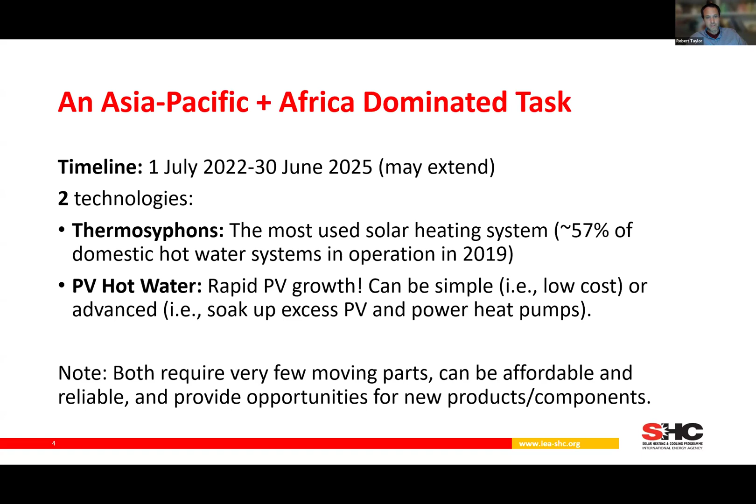The task has basically four parts to it. The first part, as Bärbel mentioned, draws a little bit on the work done by Solar Heat Worldwide—so it's data collection of how many of these systems are installed around the world, what the best practices are for them, and barriers to adoption.

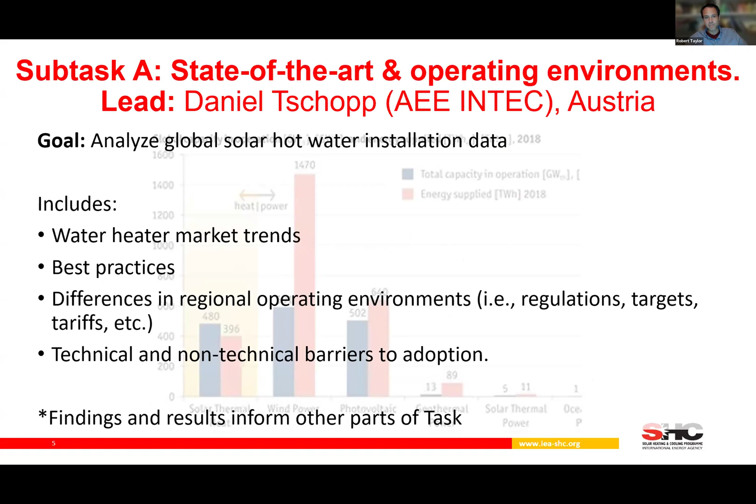There's some interesting work going on, which I'm sure will be discussed in the SOLTRAIN+ program. One of the interesting things associated with that is a test where they compare side-by-side thermosyphons to PV-to-heat systems at the Namibia University of Science and Technology.

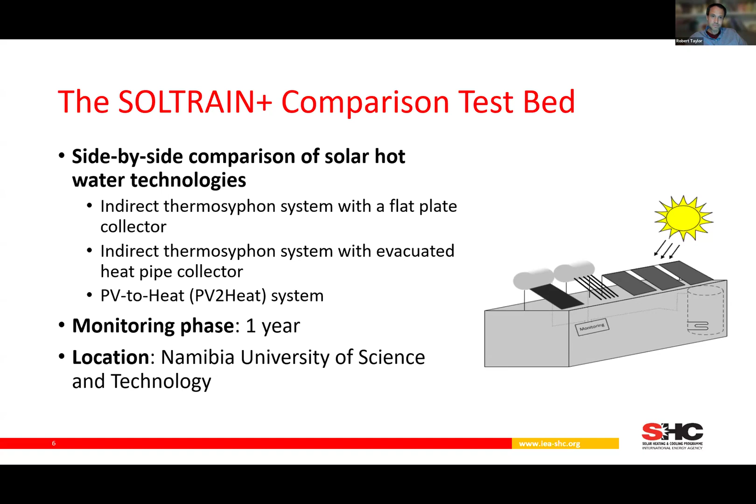The second subtask in the task is about thermosyphon hot water systems. We'll probably discuss quite a bit of that today, but another part of it, which we won't discuss today but you can get involved in if interested after this session, is looking at energy savings and greenhouse gas reductions. I think there's still quite a bit of work that can be done on these systems.

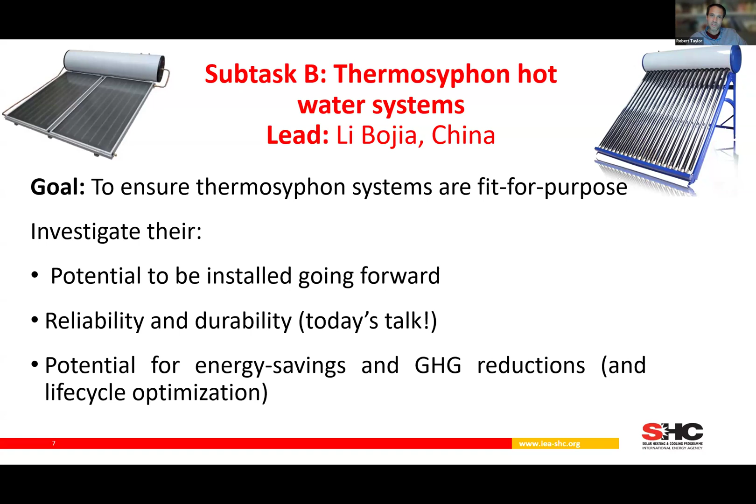Thermosyphon systems, for those who don't know, look like these two pictures at the top of this slide, where the hot water tank is above the collector. They come in mostly two flavors: one is the flat plate collector, and one is the evacuated tube collector. In both cases, as water heats up it expands, and that density difference causes hot water to rise into the tank, while cold water from the bottom falls into the collector, creating natural circulation so you don't need a pump. From that tank of hot water, you can extract water for washing dishes, cooking, or taking a warm shower.

In the third subtask, C, we're thinking about PV hot water systems. Some interesting ongoing work includes surveys we've done, identifying emerging technologies being installed around the world. It's a nascent market right now but set to grow a lot. There are ways to use your excess photovoltaic electrons instead of exporting them to the grid - you can put them into your hot water system directly, or if you have PV electricity on the grid, put that into your electric water heater.

An interesting thing about PV systems is they can also help balance the grid. Some of you may know about the duck curve, the most famous animal in solar energy. The duck curve happens as you get more and more PV on the grid - during the middle of the day, a lot of demand is met by solar generation, but in the evening peak times, solar starts to drop off.

With a solar hot water system, you can shift that around, because you can store hot water during the middle of the day and not need to pull off the grid later. So it's kind of demand side management, and there's value in that.

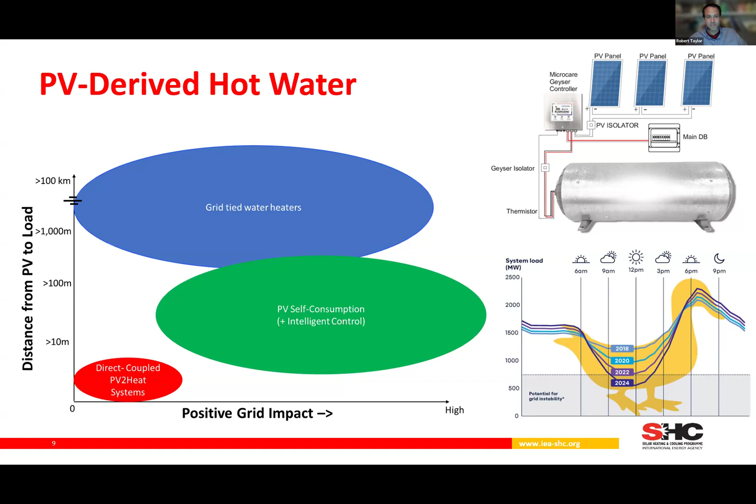If you think about how much hot water is installed around the world, it's actually quite a lot. So there's a big existing thermal battery out there in most households that have a hot water tank. Lastly, in the task we're looking at different ways of boosting training in these systems - this Solar Academy counts as one - and the standards across the world, and maybe what new standards might be needed in certifications for hot water systems.

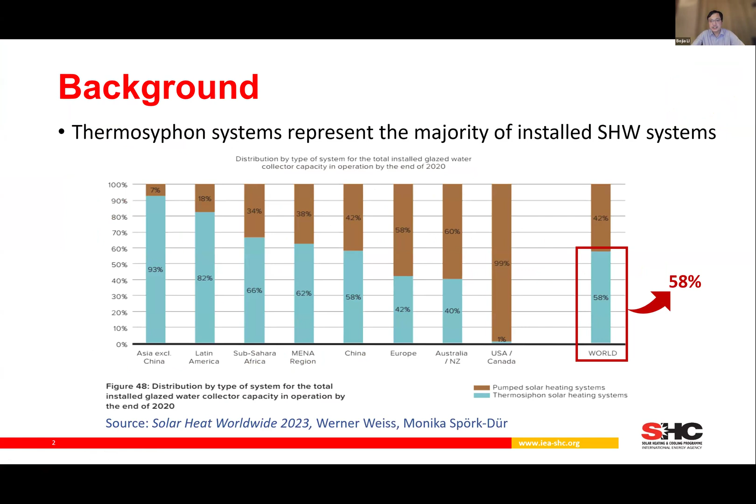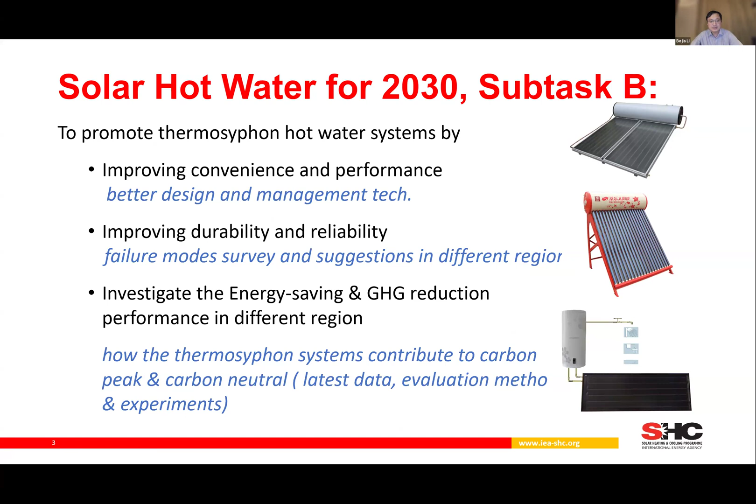Although PV water heaters have gotten great advances today, thermosyphon systems still represent the majority of installed solar hot water systems. So in this subtask, we mainly focused on thermosyphon systems to promote them by improving their convenience and performance, and improving their durability and reliability through our failure mode survey and suggestions for different regions. We also investigate the energy saving and GHG reduction performance in different regions to show how thermosyphon systems contribute to carbon peak and carbon neutral goals.

The first part I want to share is about the durability and reliability survey of our subtask. With help from Rudy, Julimo, and SOLTRAIN experts, we have investigated and surveyed some failure modes, many from the Africa and South America regions. We identified 12 failure modes and divided them into 2 categories: first is design and installation, and the second is operation.

For design and installation, it's about incorrect mounting, wrong position, missing insulation, and some other wrong positioning or not very well designed systems.

For operation, it's about leakage, antifreeze issues, and unsuitable control, corrosion, and especially in the South Africa region, we found poor water quality has some impact on solar thermosyphon systems.

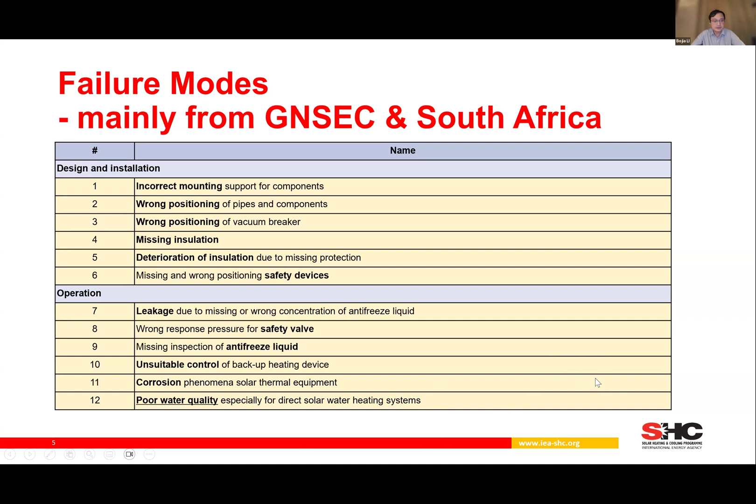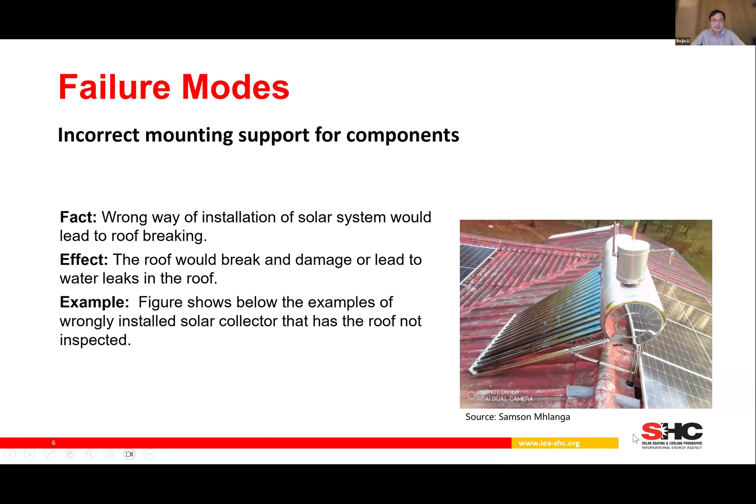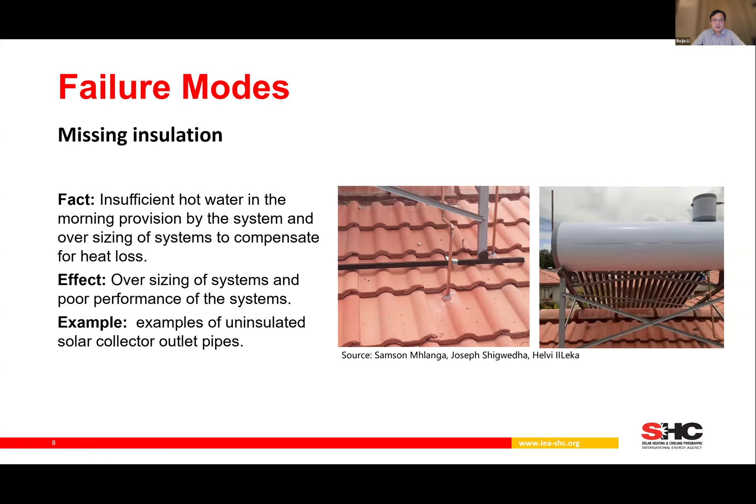The third example is missing insulation. This is very simple - in this pipe, we don't have insulation, which causes extra heat loss and makes the performance of the system not very good. At the same time, this forces the use of oversized systems. The next example is corrosion.

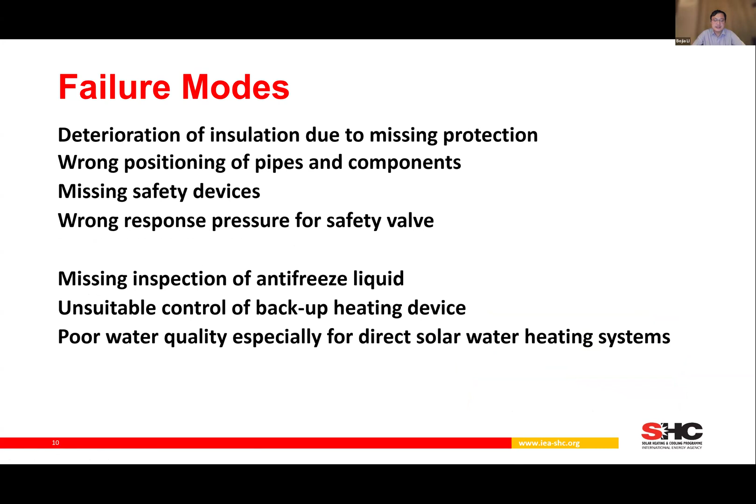We cannot include all the failure modes in today's presentation - there are several other failure modes we have detected, and we give some suggestions for different failure modes. But after all, we raised some suggestions for the total systems to cover different stages of thermosyphon systems, including design, production, installation, and operation.

Because we found many failure modes are caused by different reasons, but if we want to avoid these failures, we could go this way: first is improving the standards and guidelines to give the system a better design and basic performance.

In China, about 20 years ago, there were a lot of problems for thermosyphon systems, but now we rarely hear of problems because the Chinese standards have been improved a lot and they could maintain - they give a basic performance requirement for the product. So the system design has been improved a lot recently, making the product more suitable for Chinese operating conditions.

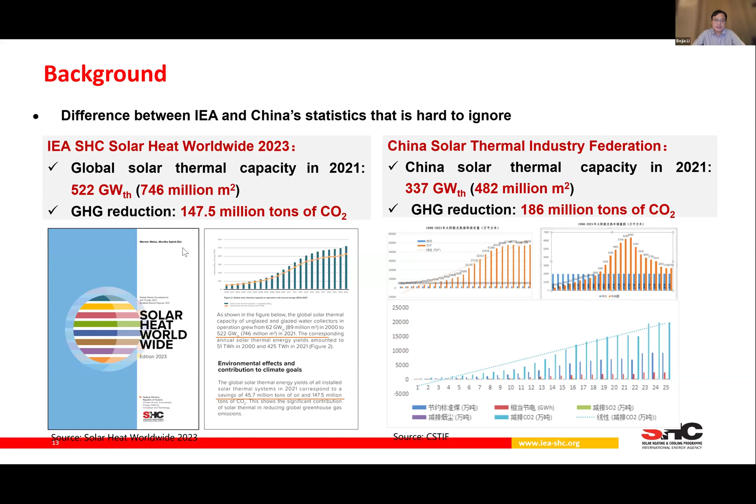There are a lot of differences between China and Europe and other countries that may cause this difference in the greenhouse gas reduction of these systems. For example, the system type in China—compact systems are the most popular—and the hot water demand, with high-rise apartment buildings being more popular, may cause some difference in greenhouse gas reduction performance for China's solar hot water systems. So we want to know how much greenhouse gas China's hot water systems actually reduce.

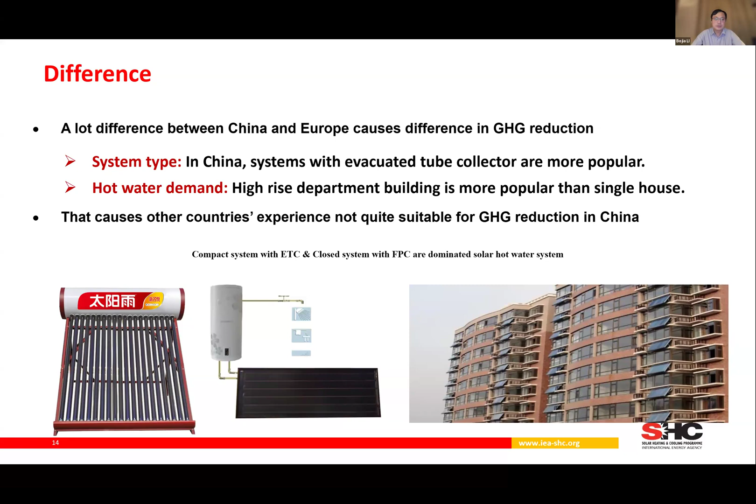To answer this question, together with Solar East and Sunrain, our academy started research on this topic to give a GHG reduction evaluation method and achieve general figures about GHG reduction in different cities in China as a reference for quick review.

The overall approach to ensure the reliability of the method includes these activities. First, we generate a general procedure to evaluate long-term GHG reduction performance of solar hot water systems.

Then, according to ISO and Chinese standards, we give a method to get initial parameters for different solar hot water systems. With these initial parameters, we build a model to calculate annual energy saving and carbon reduction of systems.

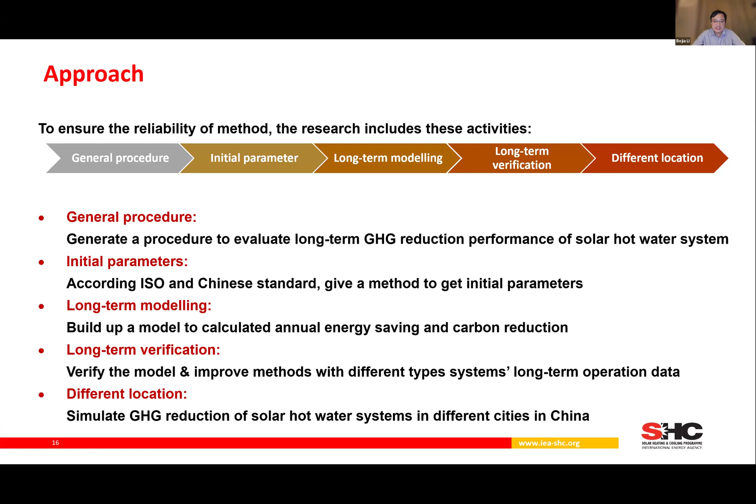We got this result, and to verify it, we built a long-term testing field, using the long-term operation data to verify the model results. Finally, we simulate the GHG reduction of systems in different cities in China with our models.

So this is the general procedure. First, we get initial parameters such as heat gain, heat loss, and output water temperature curve. We use ISO 9459-2 as the main reference.

But for the most popular system in China, the compact system, the drain water temperature remains the same as no cold water is added when water is output from the tank. So we use the Chinese standard 18708 to test this type of system and get the initial parameters.

The second step is to calculate the annual energy output and saving with simple software. This software could calculate the daily energy gain, using a method similar to ISO 9459, modified to suit the compact system.

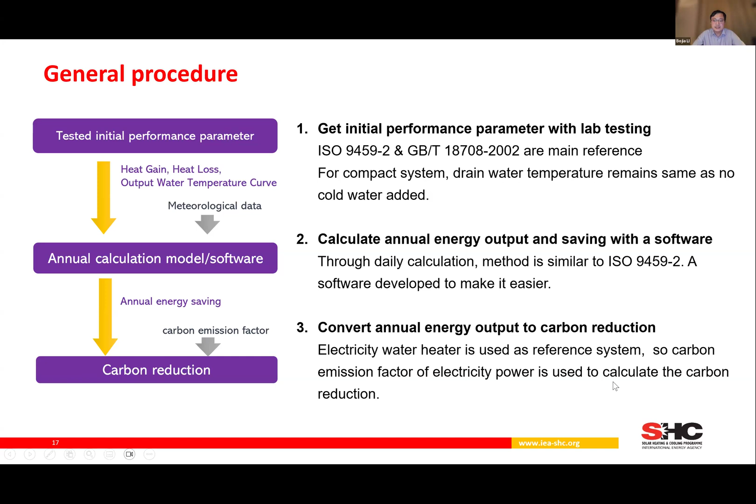The third step is to convert the annual energy output to carbon reduction. We use the electric water heater as a reference system, so the carbon emission factor of electricity power in China is used to calculate this reduction.

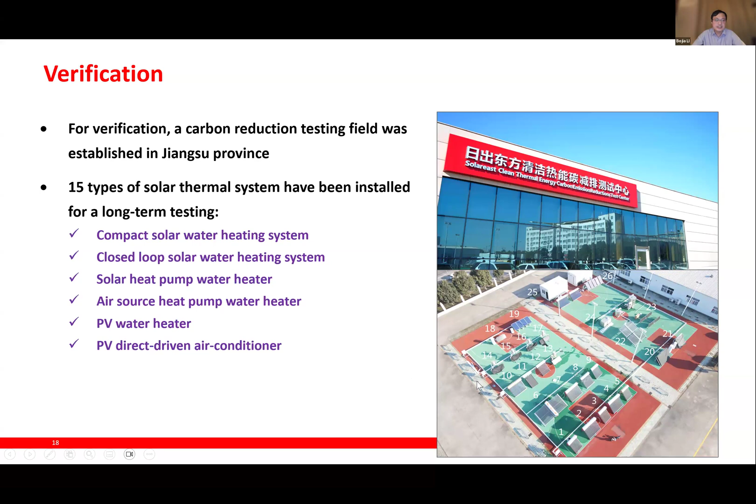And this is the verification. There was a newsletter on the IEA SHC website introducing this testing field, which was established in Jiangsu province with help from Solareast. We tested many types of systems, including thermosyphon systems, heat pump systems, PVT systems, even PV hot water systems.

But in this research, or this subtask, we use this type, this type, and this type to verify our model. This type is a compact system, and this type is a pressurized system, mainly used on the balcony of high-rise buildings.

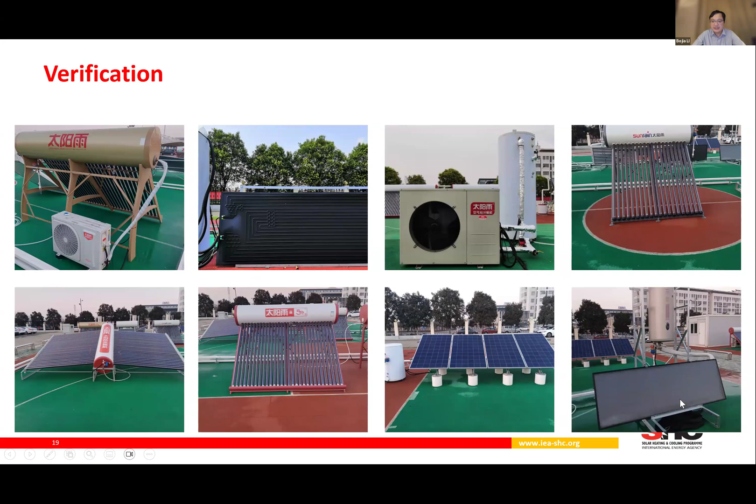This is the result of verification. The first part is the compact system, and the second is the pressurized system. As I mentioned, this type of system is usually used on the balcony of high-rise buildings, while this type is usually more popular on the rooftop of buildings.

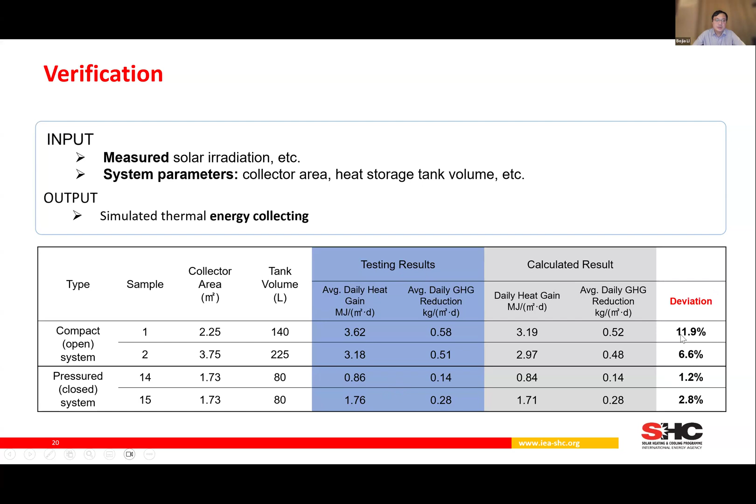For the deviation between testing results and calculated results, we could see the deviation is about 10%. So we think this model could be used for long-term simulation.

And to get the greenhouse gas reduction, because China is so large and different cities have different climates, we chose 14 cities with different solar energy resources to calculate the annual GHG reduction per unit square meter collector of the solar hot water systems.

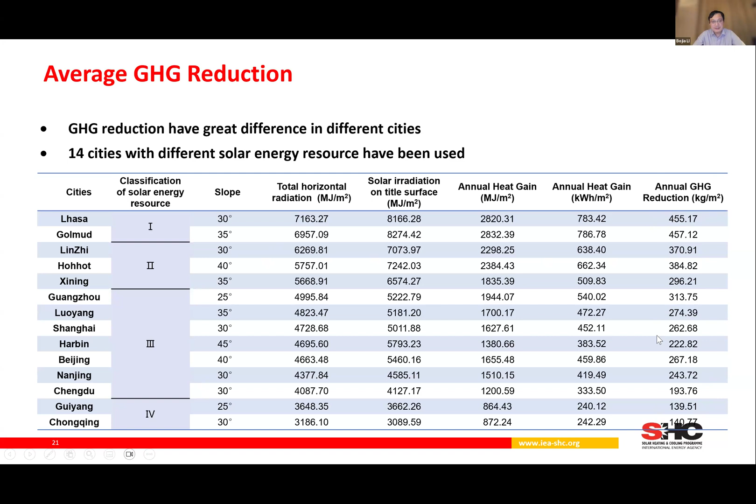And the figure is very different, from 140 to 455. But to get an average for China, we use the population for different regions because the solar hot water system is so popular in China—maybe almost every single family has this type of system. So the more people, the more solar hot water systems. We calculate the average GHG reduction by weighting the population of each region and get an average figure of about 490 kilowatt hour per square meter collector, and the average GHG reduction is about 284 kilogram per square meter collector.

According to Solar Heat Worldwide 2024, the total installed collector area in China is 545 million square meters. If all of them are solar hot water systems, we can get an annual GHG reduction of about 155 million tons. So this figure is closer to China's figure, and maybe larger than the Solar Heat Worldwide figure. So this is our initial result, and we are doing further analysis, and maybe we could give more analyzed results in the future.

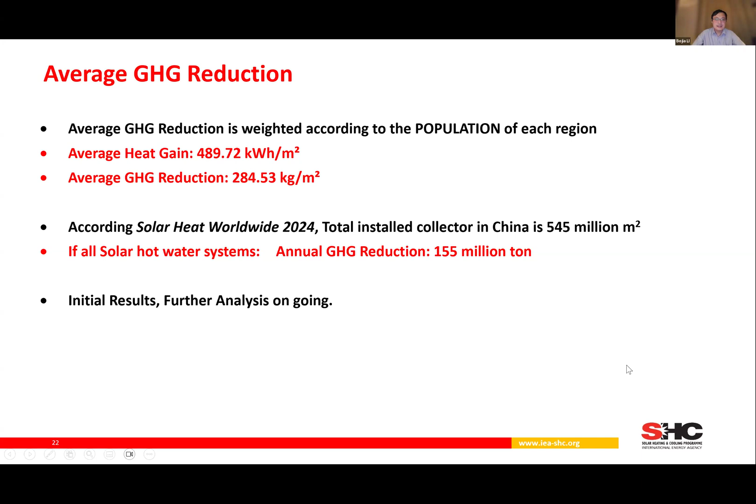Okay, that's the main part. For advertisement, we will have a meeting, as Robert just said, this October. The IEA SHC task meeting will be October 11th, and on October 12th we will have the Sustainable Solar Building and Industry meeting in China. If you are interested, please contact this email, or you can contact us. Okay, that's my presentation. Thank you.

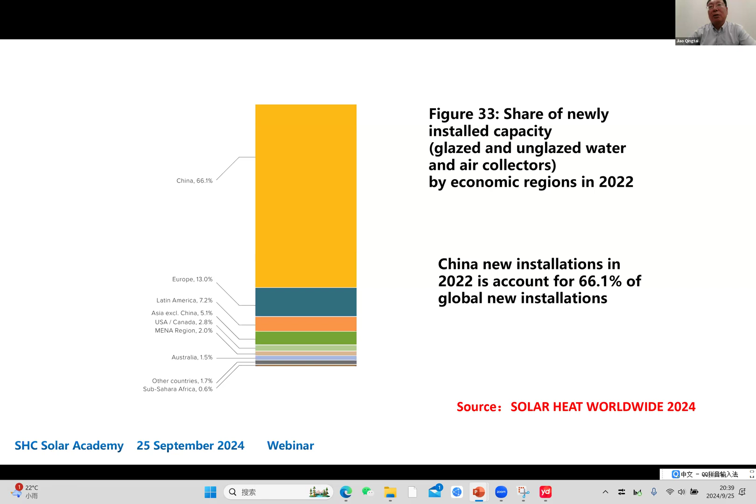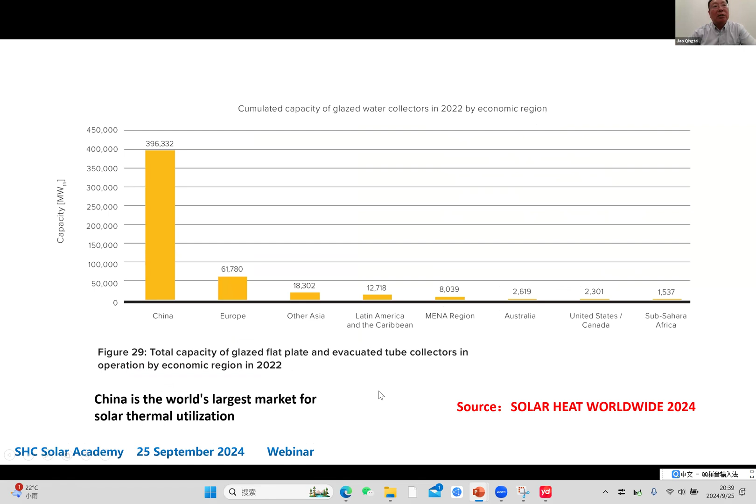Hello everyone, thanks for Bojia's introduction. My topic is the current situation of solar water heaters in China. Mainly I focus on thermosyphon systems. Actually, based on Solar Heat Worldwide 2024, you can find that in 2022, China's new installation accounts for 66% of global new installation of solar collectors, and the total installed capacity in the Chinese market until 2022 accounts for 73% of global total installed capacity. So without any doubt, China is the world's largest market for solar thermal utilization.

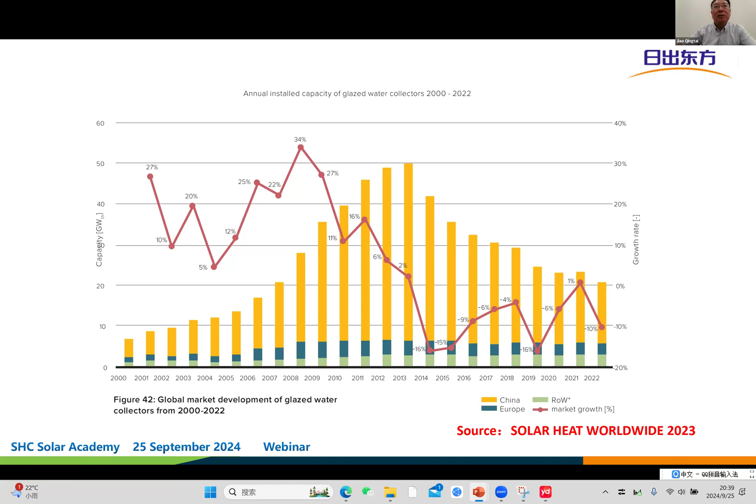But when you notice this figure, you can find there is one very important year: 2013. This is for the global market, but mainly it's because of the Chinese market. This figure shows the Chinese market and the European market. The blue line is the European market, which is more stable, but for the Chinese market, the yellow line, you can find that before 2013, the Chinese solar thermal market grows very, very fast, but after 2013 the market decreases very fast too. So we usually say in China that 2013 is the watershed year for the Chinese solar thermal market.

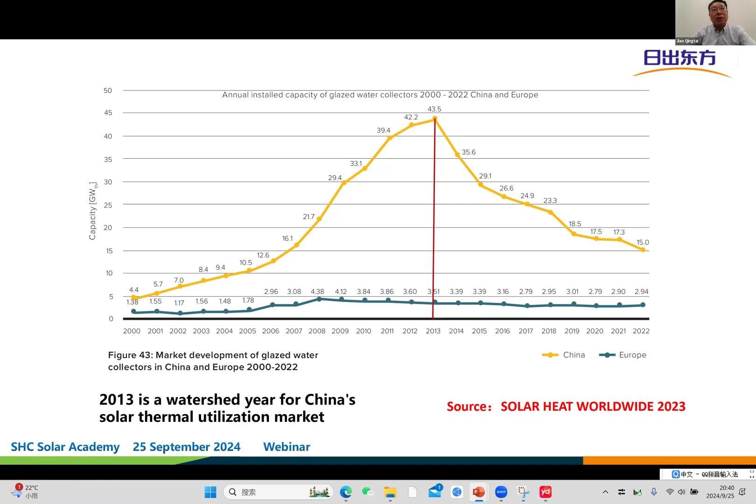In China, the main product is the very typical solar thermosyphon water heater with a vacuum tube, and the principle is very simple. When the vacuum tube absorbs solar energy, it heats the water in the tube, and the high temperature water will go up while low temperature water will go down, so we heat the water in the tank step by step.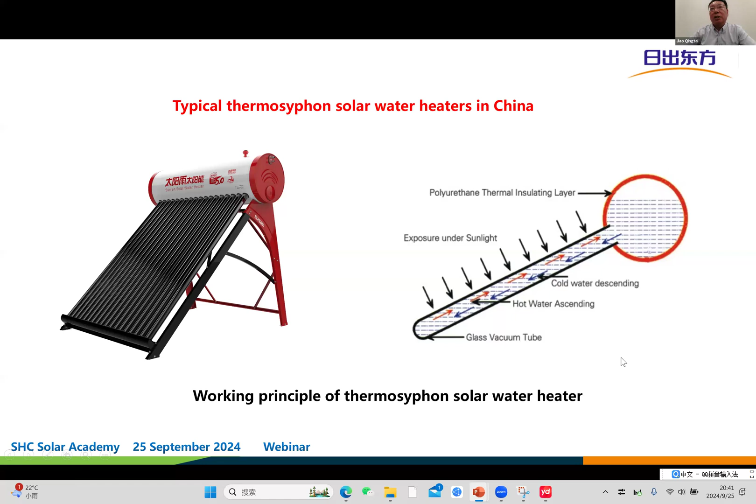Now we're going to talk about the reasons for the rapid development of the market before 2013. There are so many discussions and even arguments, but in my personal opinion, I think there are some reasons below. The first is that before 2000, Chinese urbanization rate was very low, only 35% in 2000—that means around two-thirds of people were living in the countryside.

During that time, most people bathed in public bathrooms, but people wanted to bathe in their own house, so energy supply was also inadequate. There is no natural gas supply in the countryside, and the electricity grid is also very weak. Even in large and medium-sized cities, the gas and electricity supply were insufficient. So at that stage, solar water heaters were almost the only product to solve the problem of bathing at home, especially in the countryside. In rural areas, the solar water heater was the most important product after TV sets.

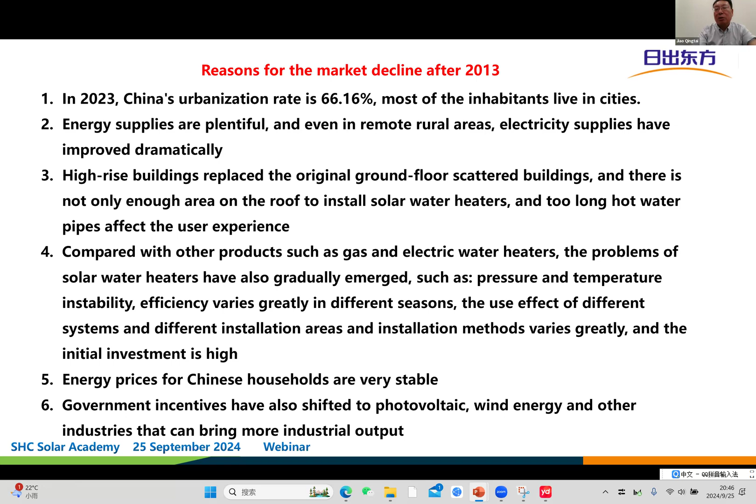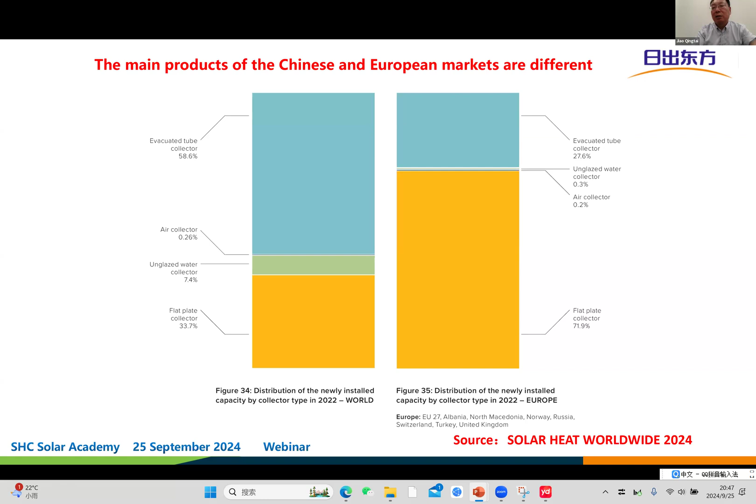But another thing is, in China, the main product of solar thermal is different from Europe. In China, the main product is the vacuum tube solar collector, but in Europe it is the flat plate solar collector. Actually, China has all the products and technology related to thermal utilization. Why is the vacuum tube more popular than the flat plate collector?

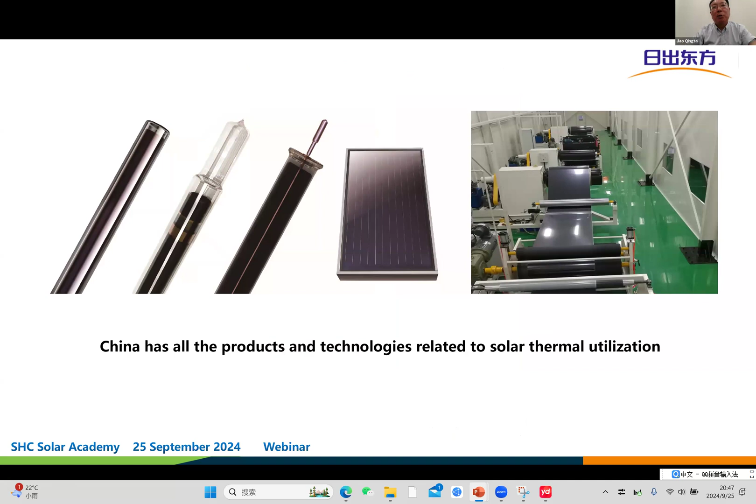That is because the market development stage is different. The initial Chinese water heater market customers were concerned about economics rather than comfort. The vacuum tube thermosyphon solar water heater had so many advantages during that time: a reasonable price, simple installation, easy after-sale service, and wide application area. Even in North China, with very cold weather, the vacuum tube solar water heater can work well. So it's very suitable for the Chinese market.

However, the production process of the vacuum tube is complex. Especially the kiln for the production of high borosilicate glass tube, which must be continuously produced, it is only suitable for a large enough single market. If the single market is not huge enough, it's difficult to produce the vacuum tube. For example, the lifetime of the kiln is around 3 to 3.5 years. That means during those 3 years, the production line cannot stop even 1 day. So the market needs to be huge enough.

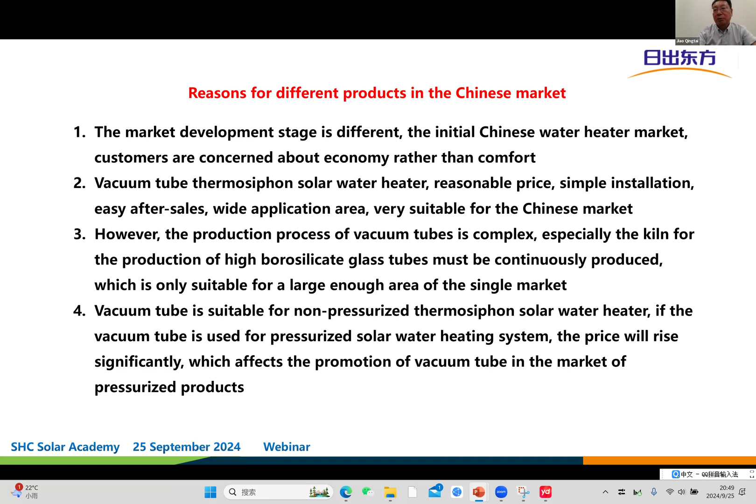The vacuum tube is suitable for non-pressurized thermosyphon solar water heaters. If the vacuum tube is used for a pressurized solar water heating system, the price will rise significantly, which affects the promotion of vacuum tube collectors in the market of pressurized products. This is why in China the main product is the vacuum tube collector. This is the process for the vacuum tube, for the glass tube, and the vacuum tube.

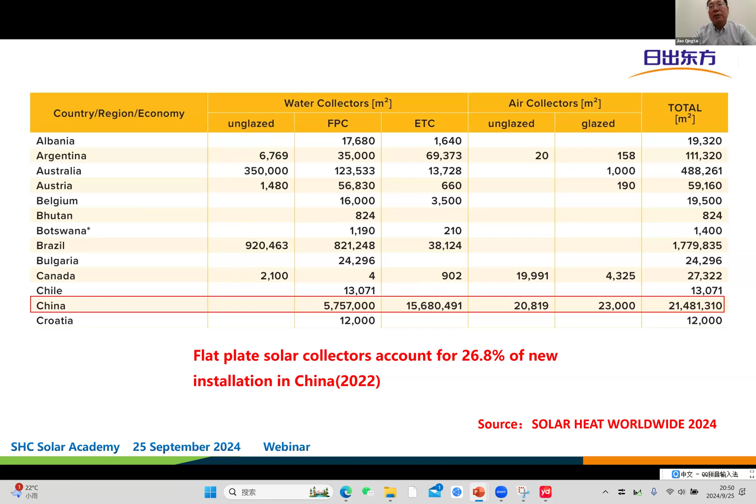Another point: in 2022, the flat plate solar collector accounted for around 27% of new installations in China. Compared to 2008, the flat plate collector accounted for only 8% of China's total solar collector installation. And the new installation collector area in 2008, the flat plate collector only accounted for 5% in China. That means even as the market decreased, the flat plate collector increased faster than the vacuum tube collector.

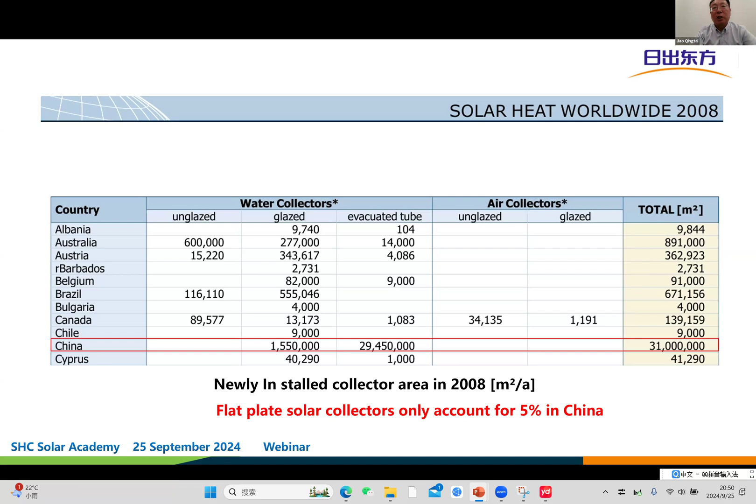That is because in the cities, there are more and more high-rise buildings, and for these buildings it's very difficult to install vacuum tube solar collectors on the top. As I mentioned, there's no enough space for the solar water heater, and also the very long hot water pipe is not suitable.

So in China, we developed a balcony system. That means we install the collector outside of the balcony, but the tank inside the balcony. This solves the installation problem on high-rise buildings. But because the collector is installed outside the balcony, safety is the most important concern. So people prefer to use the flat plate collector because its cover glass is tempered, making it safer, while the vacuum tube is not tempered.

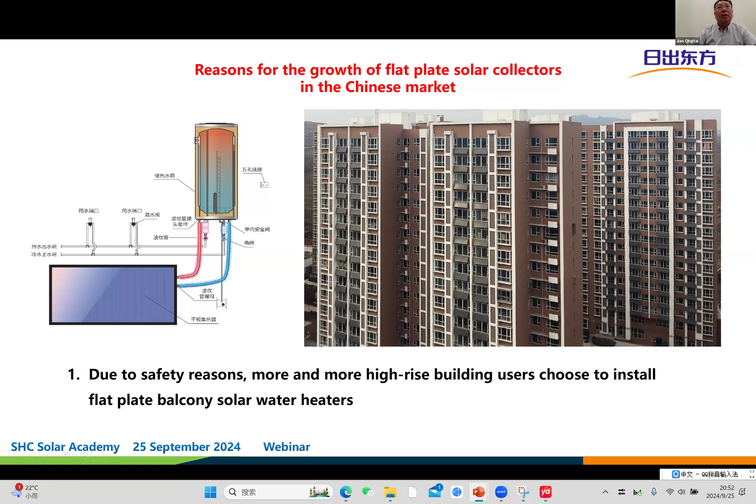Another reason for the growth of flat plate collectors is economic development. Customers are more concerned about the stability of the hot water system and comfort of use. So more and more customers are willing to choose pressurized hot water systems, especially for industrial process heating and large-scale space heating systems. So the flat plate solar collector has more development opportunity.

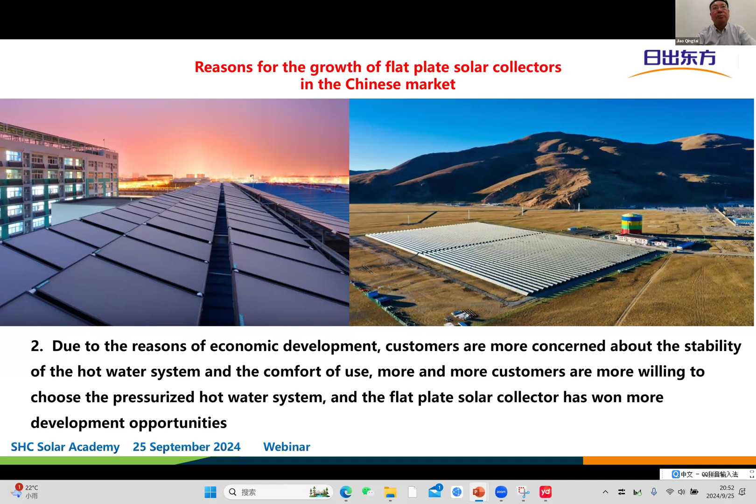In conclusion, Chinese thermosyphon solar water heaters face strong competition from electricity water heaters, gas water heaters, heat pump water heaters, and also PV. The market continues to decline, but many companies have turned their focus to solar district heating, industry and agriculture applications, and even heat pumps. But thermosyphon solar water heaters have huge potential in South America and Africa. For example, China exports nearly 1 million vacuum tube solar water heaters to Mexico every year.

Okay, thank you for your attention.

Thank you, Jiao, a very interesting report about Chinese market development. I really like the huge high-rise buildings with the big thermosyphon systems up to the very top floor, which is really fascinating. This only exists in China for sure.

So we have a last speaker who will cover a completely different region again. Thanks for that, Rudi Moschik. He is senior engineer at the Austrian Research Institute AEE Intec. He has over a decade of experience working with solar collector systems for solar hot water in the Southern African Development Community, SADC in short, region, which is the Southern African countries. He was involved in a lot of field visits, installations, and trainings in the SADC region, and he will give us a very detailed insight into the current situation and development in this part of Africa.

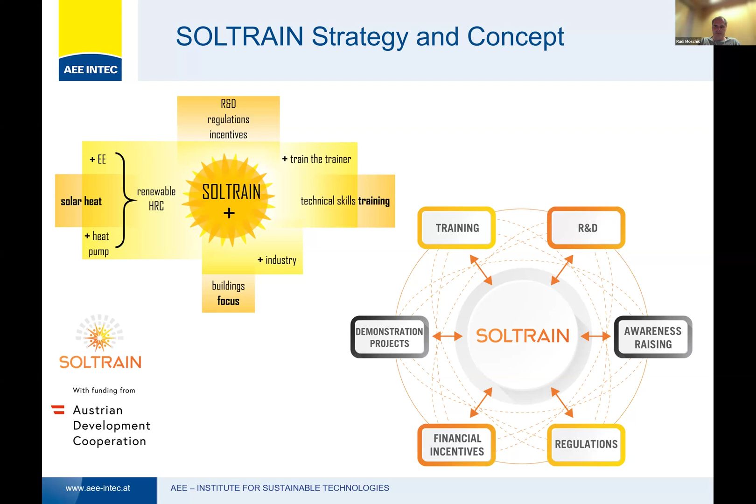For this presentation, I give you a short summary of my content for today: a brief situation about installations, which we have heard already a lot about in the previous presentations. I will show you some results, roadmaps, and the potential we have in Africa, the challenges and requirements important to be successful in this technology, a short overview about best practice and cost situation, and the final conclusion, summarizing what we have heard already in the previous presentations.

In the current SolTrain phase, and the last SolTrain phases, we have funded more than 700 systems within the project, resulting in more than 7,000 square meters of collector area. In this presentation, I have included some pictures of standard Thermosyphon units for single family houses, but also for staff units, residential houses, and student hostels.

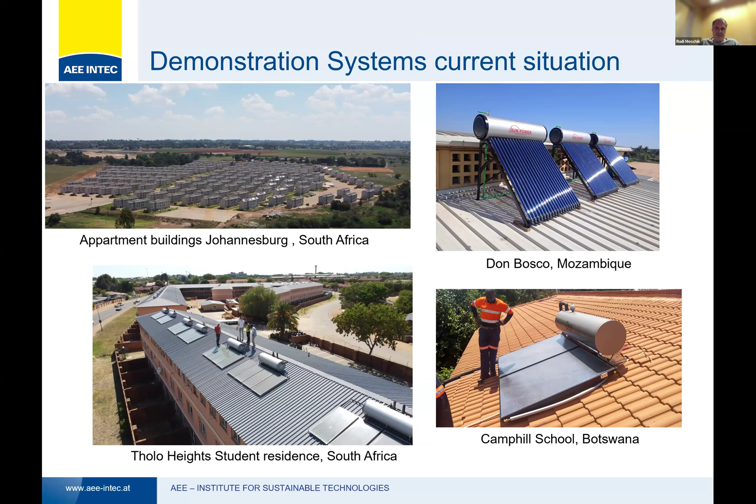In South Africa, as mentioned before, there's a big trend going to PV to heat. You see here the number of installations increasing rapidly over the last 3-4 years, having installed nearly 10,000 systems in 2023. This market, with lower PV costs, will for sure become more interesting in the future.

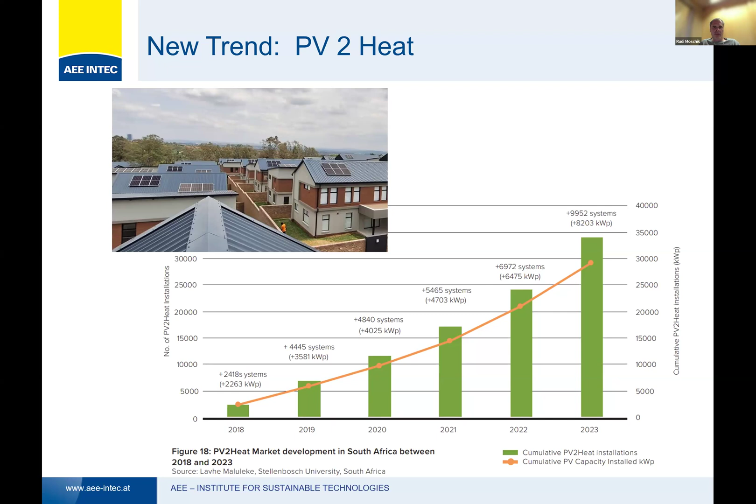On the other side, we have available data analysis by the Solar Heat Worldwide report, where we cover more than 70 countries and are able to compare yearly installation and market data for this technology. We see especially in Africa, in the sub-Saharan region, we have about 13 countries, but Africa is still somehow a black continent—a lot of countries are not really delivering data for this yearly report. So we have to look forward how we can improve to get information about installations in other countries.

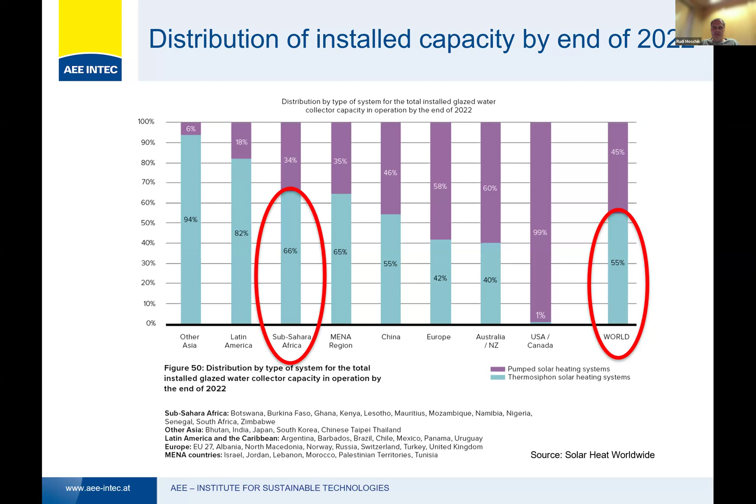We have seen this graph already before: how much is the percentage of installed capacity divided by Thermosyphon technology or pumped solar heating systems. Thermosyphon systems are still the larger market worldwide if we look at installed capacity. Going in detail to Africa, you see that the main market is Thermosyphon systems, more than 66%.

Having a short look in the past, in the year 2022, we see that the total distribution of Thermosyphon systems worldwide is going down. We have heard the reason, mainly China, because they switched from Thermosyphon units to pumped systems, and mainly going for very large pumped systems, as we have seen in some pictures before. In Africa, it's the opposite—the Thermosyphon market is still very relevant, dominating and increasing compared to pumped systems.

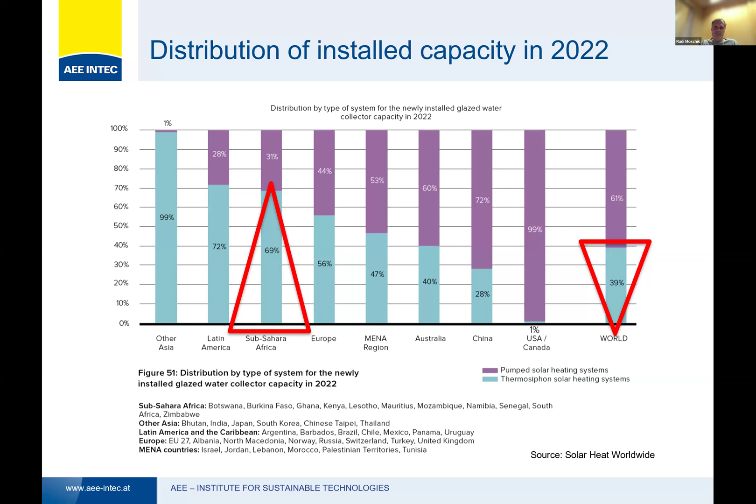One main aspect in our SolTrain project was also to give a guideline on how different countries reach certain goals, so we have established solar thermal technology roadmaps in many countries. They are available under our SolTrain website. In these solar thermal roadmaps, every country has set their own targets, for how much square meters and how much capacity they want to install by 2030.

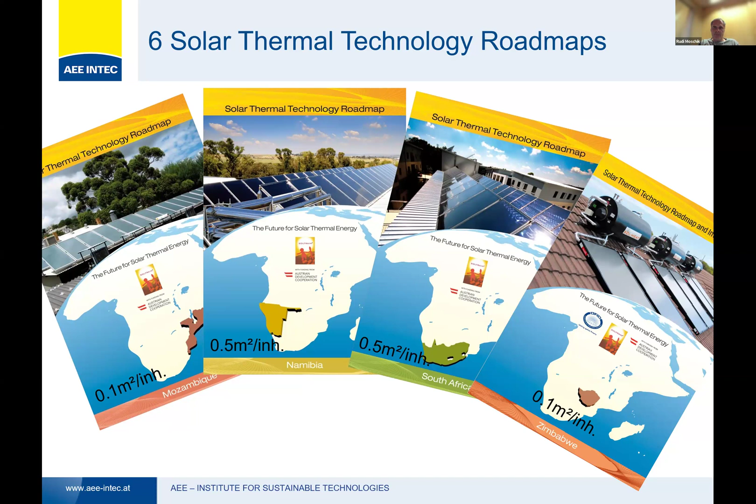As an example, this is somehow the vision of Zimbabwe. We see on the one side they have a target of 0.1 square meter per inhabitant by 2030. If they reach this number, it will result in an installation area of 2 million square meters.

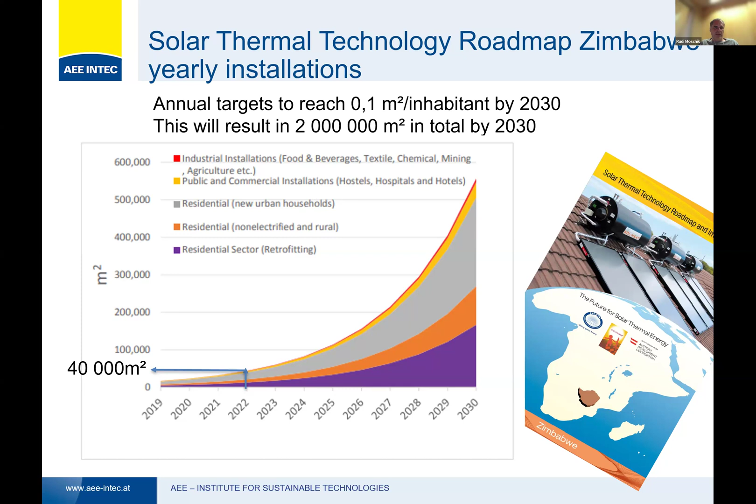How is the status at the moment? According to this roadmap, Zimbabwe is basically good on track—they should have installed about 40,000 square meters by 2022 according to the roadmap. If we look at the data of the market reports, the documented installation in Zimbabwe in 2022 was 33,000 square meters. So, having the roadmap in place, having the vision and the goal, you can always compare where you are at the moment and how far you have to increase your action to reach the final installation area.

This graph is also a very good presentation of the current status. If we look at these yellow spotted countries, these are all countries in the SADC region. There we have at the moment the highest specific installation capacity in South Africa, 15 kilowatt thermal capacity installed per 1,000 inhabitants, representing 0.02 square meter per inhabitant.

The lowest value we find in Mozambique, where we have for sure a lot of issues and struggle a lot to implement solar thermal technology.

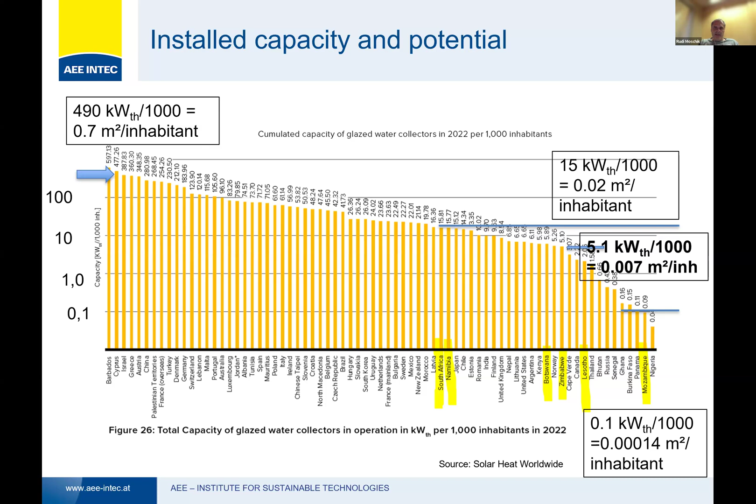What are the challenges? We have heard already today some of these challenges which also occurred in China 20 years, 10 years ago.

On one side, especially in Africa, there is no certified body, no clear standards available. Quality management and quality of installation is not the best. Some countries adapt existing standards which are partly 20 years old or even older. Also the knowledge of installers and producers regarding the use of standards is limited. Therefore we have a big issue in quality of installations and also in the choice of quality systems.

On the other side, which is also very obvious, there is a lack of maintenance. Sometimes I have the feeling this word doesn't exist in Africa. But if we look at the car sector, mobility sector, there they offer and do a lot of maintenance. This activity is also required to have a long-lasting solar thermal system.

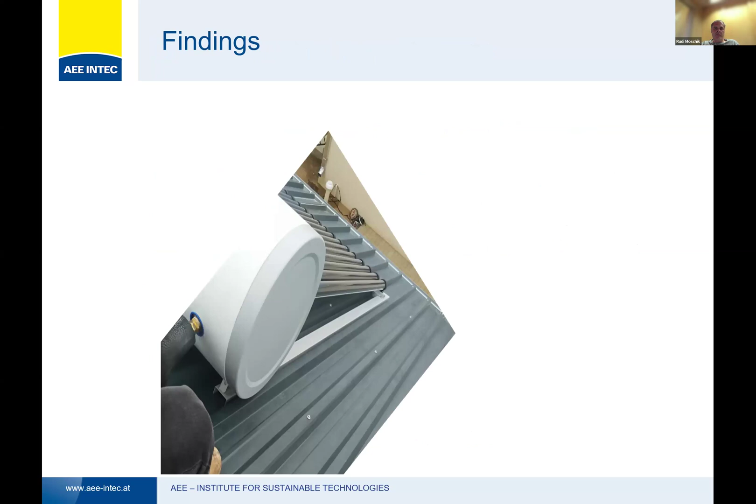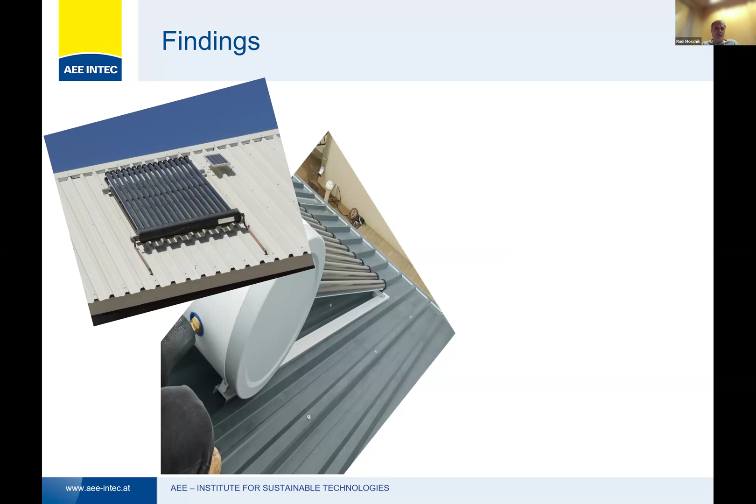We have seen already some issues which we have during the installations. Lee has mentioned some, yeah, some are very obvious. You see this installation is upside down, and the installer was really insisting that this system was working, but the water was just heated by electricity in this case.

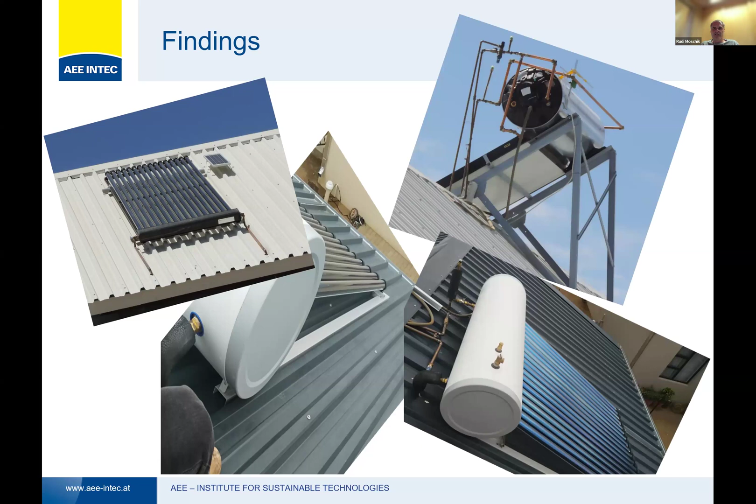We have seen already this picture, missing insulation, insufficient fixation of the systems. And of course, if you don't follow some standards, you get also this nightmare installation of solar thermal systems.

Therefore, and this is a main aspect of the Soltrain project.

Can you speed up a bit, Rudi? Yeah, because of our Q&A.

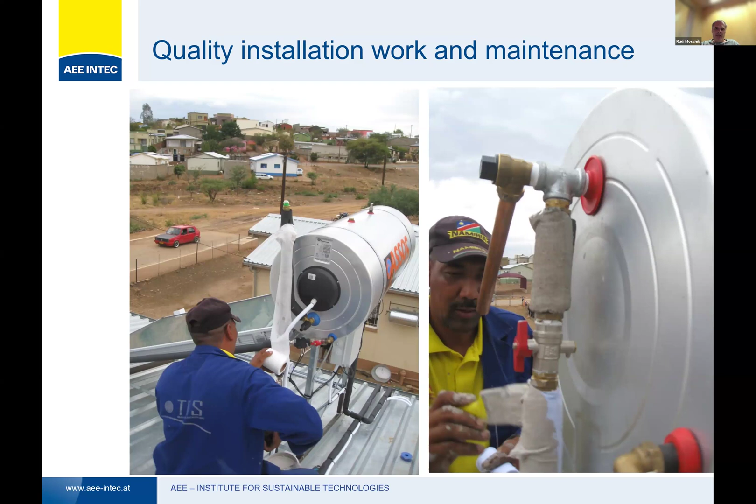Quality installation and maintenance is very, very essential, very important. We have some best practice examples, systems which are working already nearly 20 years with nice maintenance. The picture on the right side, this system is nearly 20 years old. It's not looking like this, but it's 20 years operating.

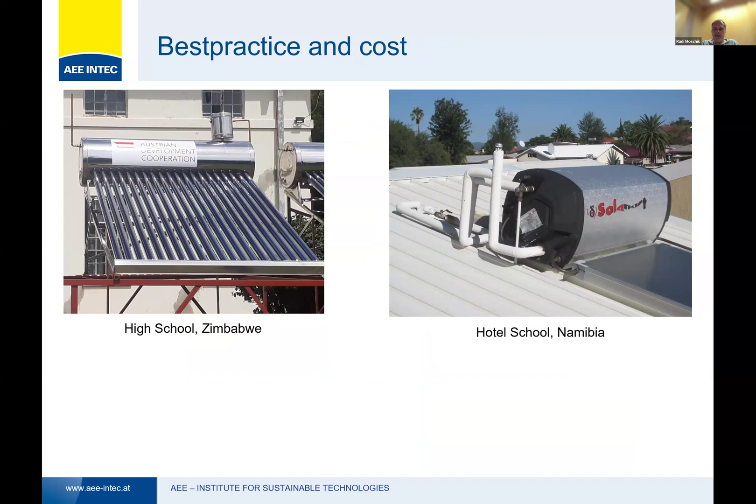We have quite high solar resource in Africa, nearly all over Africa, and have done a lot of evaluation and monitoring. We can somehow work with a solar yield of more than 750 kilowatt hours per square meter and year, and having much better climatic conditions compared to Europe and China, we can easily reach a solar fraction of 95, sometimes 100%.

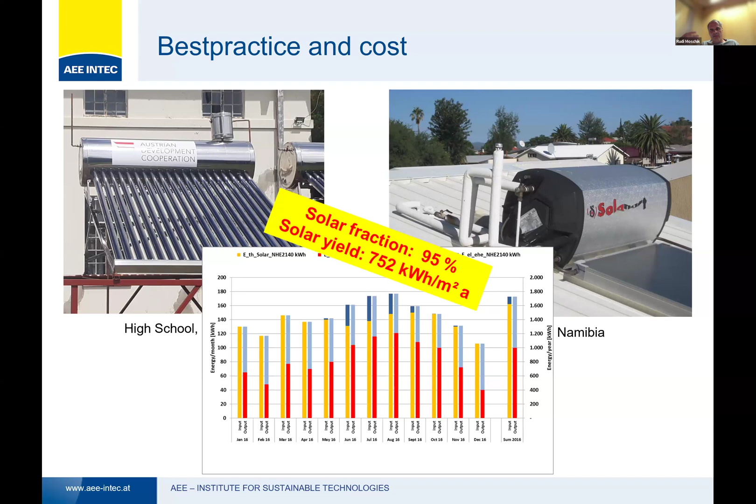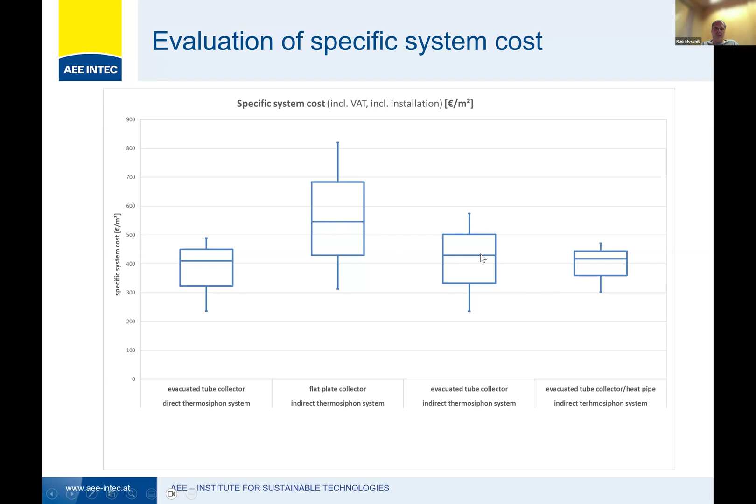Also, the cost perspective is always an issue. Here we have evaluation of more than 300 systems done over the last 3-4 years. In the first column, we have just direct thermosyphon systems, the cheapest, with an average cost per square meter around 400 euro per square meter. The indirect thermosyphon systems with flat plate collectors are a little more expensive, with a maximum price of 800 and an average price of 550. The indirect systems, which are dominating the market at the moment, are also in the range of 420-430 euro per square meter.

Coming to my conclusion, and this was also mentioned before, on one side we need clear definition of the quality of installations and material. A lot of training activities in all sectors are required, and here the people really need experience by doing practical installations. Finally, we need quality control to really achieve these goals of sustainable and long-lasting systems.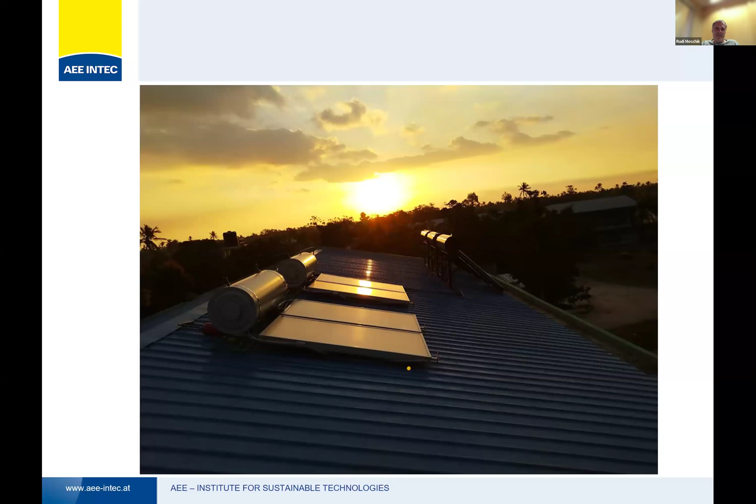So far, a last impression from this nice African continent. It's really a fascinating continent, and hopefully there is a big potential, a big market, and a lot of possibilities.

Thanks very much, Rudi, thank you. This was a nice last photo.

This inspires me at the same time to pick the question here on how we should give instructions to architects and how to fit solar water heaters nicely on the roof.

Rudi, do you have experiences with that, even where to place it? I think there are tanks which are placed below the roof now and the collector above, so that it's not so obvious. Do you have tips for architects?

Yeah, I mean, this is a good question and a difficult question because architects are looking on the view. They are not looking on the technical perspective of the whole building design.

In this case, I guess thermosyphon units will not be the right technology.

And here we see big, let's say, advantages with PV. I guess this is not the market for thermosyphon systems, so here we have to think about other technologies.